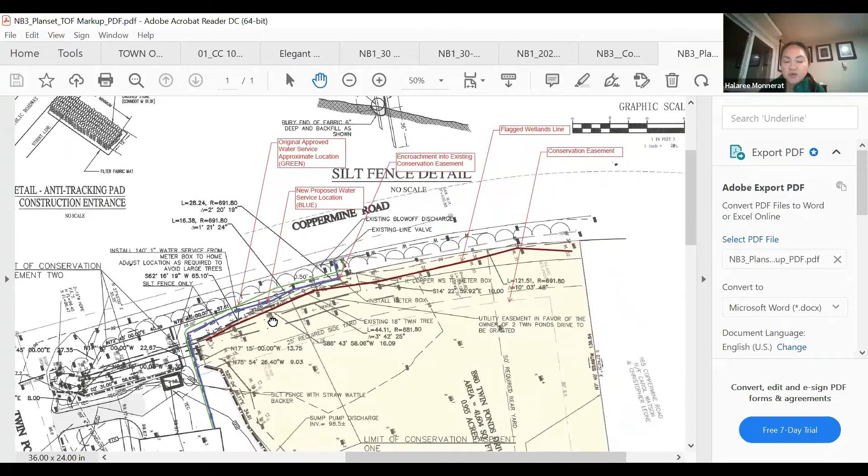Okay, so 2 Twin Ponds Drive. Can the applicant give a general description? I am requesting that we make a modification to the previous approval to just move the water service a couple feet onto my property instead of the public right of way, because per regulations we can't run water service on the public right of way. So I'm requesting that we just move it back a few feet onto my property.

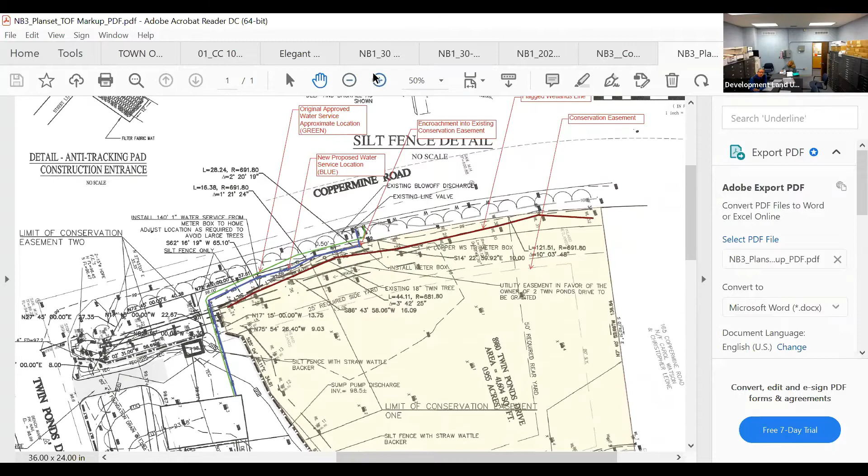Okay. If everyone read the agenda reviews, we've been working pretty long hours on this with Halaree, the state health department, as well as Connecticut Water. The way they had it shown before is the green line, and you can see where it comes off the main line, curves, runs along the right of way, and cuts back in. They won't let them do that per state law; they have to come off at a 90-degree angle out of the property. So that's what this shows: it comes out into the right of way and then follows along on their property back in. More or less it follows the same line.

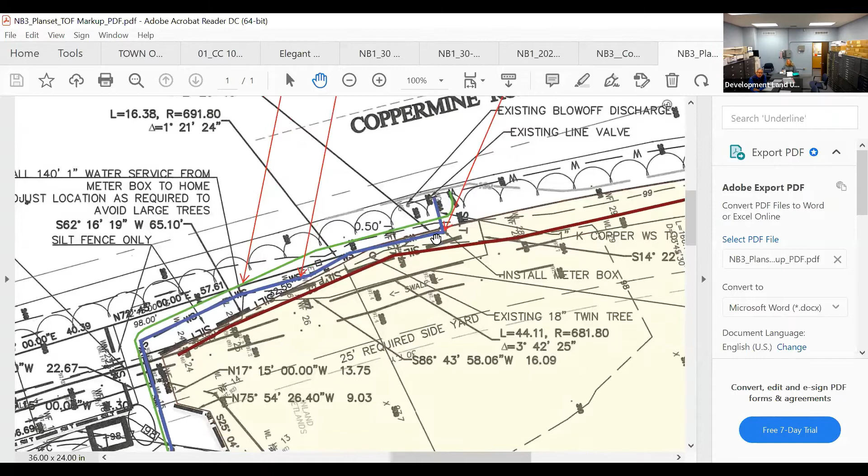The only difference is it does cross into a small portion of the conservation easement here. I showed everybody in here there is a statement that allows such things to happen during building: the grantor reserves the right to enter the property for the purpose of constructing and maintaining any improvements, including drainage structures which are required or permitted by the approval granted by the Farmington Inland Wetlands Commission. Hence why we're back to you guys.

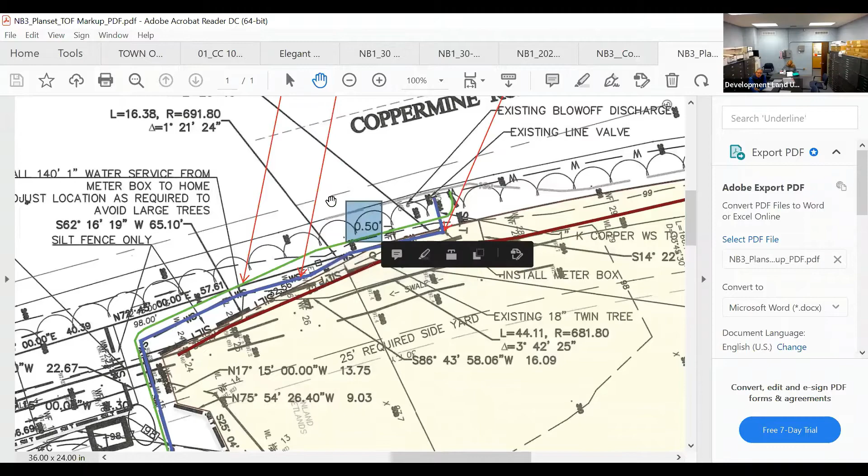I guess also we're making a motion. I think this is a slight modification, so maybe this is ancillary, so we can just approve it tonight. That would help them out to get this thing started and get over to the house so they can get into the home.

Okay, well I guess I'll go for any questions. Mark, do you have any questions? No, I don't. Okay, Dave Fox? Just a couple quick ones.

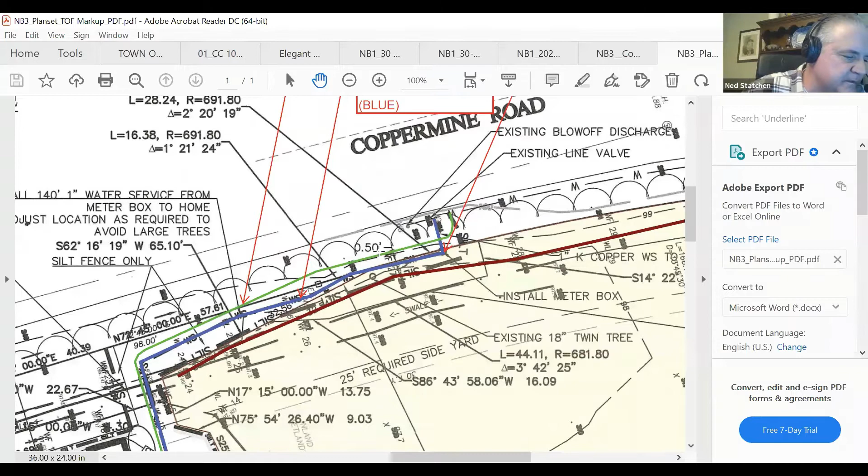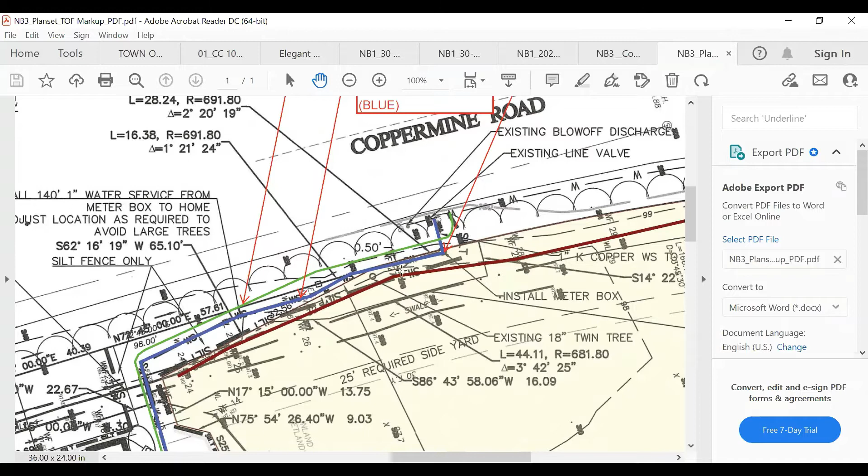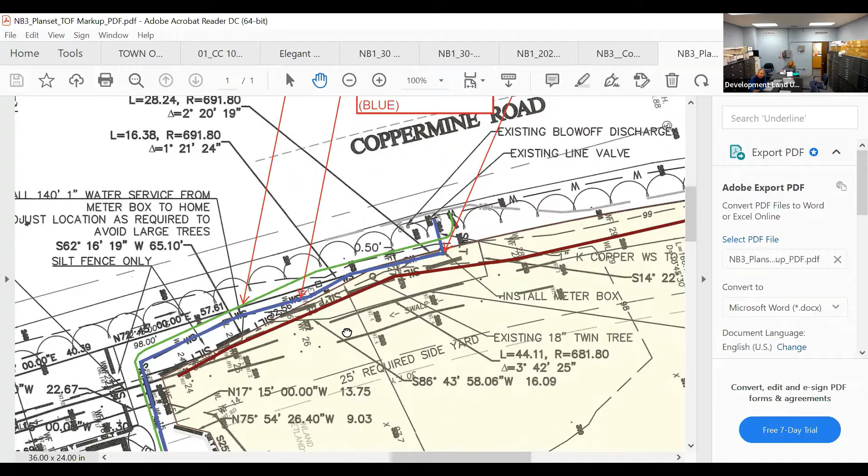It looks like the blue line is about halfway closer to the wetlands red line beneath it. I was just wondering, I can't really tell how many feet separates the line from the wetlands edge, just approximately. Let's take a look here. Find the line. If this is 27 feet, let me see here. What's this? I can't... that's 13 feet there. So I would say it's got to be... stupid thing, locked up again, I hate when this does this.

It's probably 5 feet or so.

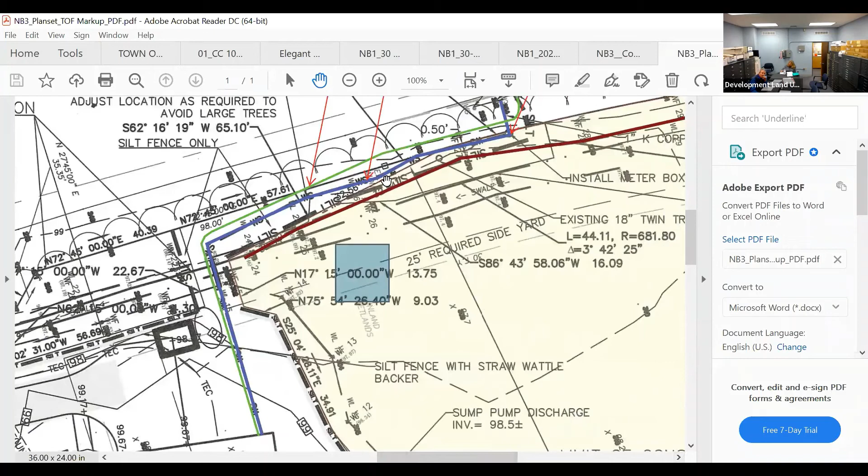There's a portion where it says silt fence only, as opposed to the fence and the sock. I was wondering why that was. That was carried over from the original plan, but I do have that in my agenda review, that it has to be silt sock as well. Okay, thank you, I'm done.

Along those lines, the silt fence with straw wattle backer - it says silt fence only in some parts, then here it shows both. So we'll be going with the silt fence and straw wattle at both locations, right? Yep, okay.

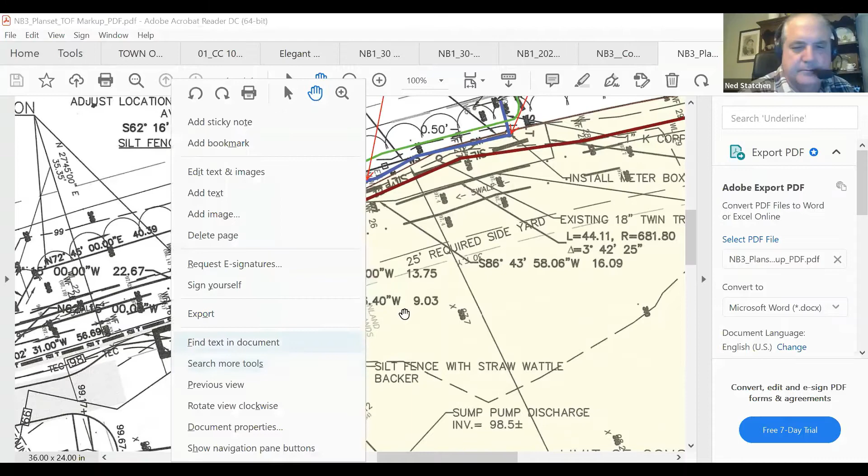Neil? Nothing from me, thanks. Robert Eisner? No questions, it looks like a slight modification, a necessary change without substantive change in impact. Yeah, I would agree. Did I get everybody? Rich Berlandy? He's not here. He's up, okay, but you got everybody, yes.

Is this out of the swale? I see the swale is here, so they were going to be running it parallel to the swale and then cutting across in the same spot. So the only real change is right along the edge of the road - it's going to be in a portion of the easement here.

It does seem like a minor change, and it's certainly necessary to get water to the property. I don't have any further questions or concerns.

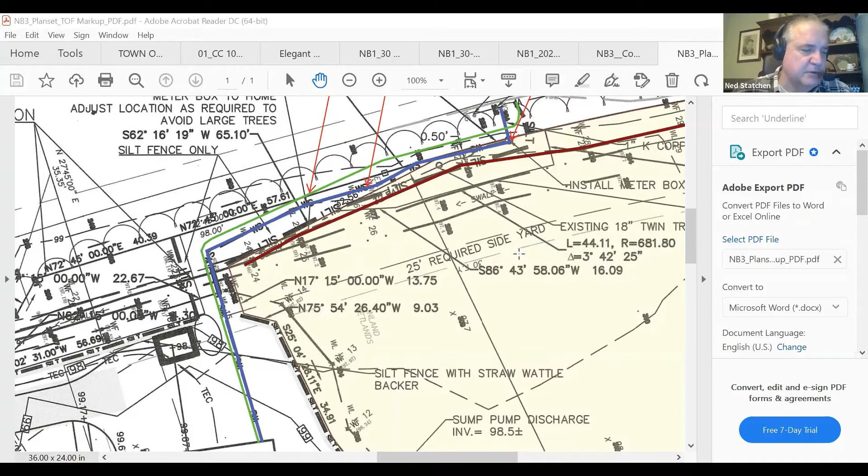The chair will entertain a motion to approve the revision, adhering to the recommendations from the town agenda review. So moved by Mark. And a second - Dave will second. All right, we have a motion and seconded.

All those in favor say aye. Aye, aye. Opposed? Motion passes.

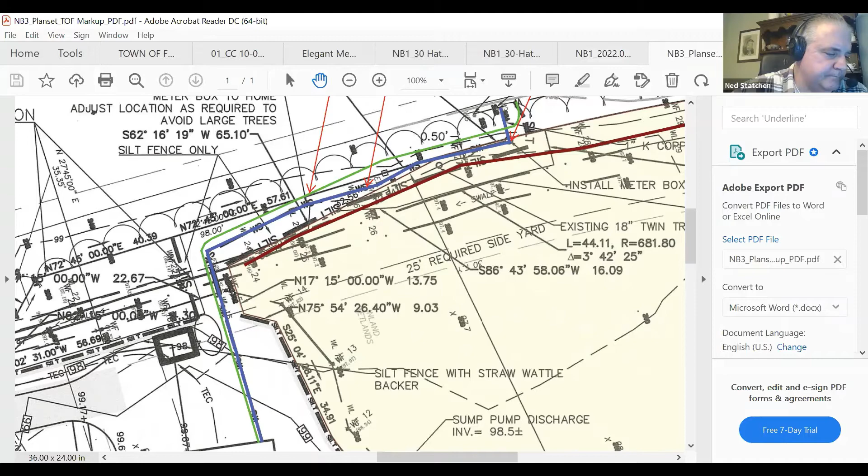Okay, now we'll go to 30 Hatters Lane. Yes, sir, let me grab that and put it up on the screen.

A little refresher - who wants to give it, Bruce or Kent? Well, Kent is on, I'll let him do it since I missed the previous meeting. Are you there, Kent? Yes. Great, just give the commission a little overview of what you're doing.

I got it on the screen, not sure if you can see that. We have an erosion problem with the stream bank in the back, and we were just going to put some armoring along the sides of it and along the bottom. For the commission, this actually captures both road runoff and runoff off of Diamond Glen. It gets piped out right here in an open swale through here across some properties and then eventually into Dorset Pond.

I'll start with my question from the review of the video and minutes. There was a small pedestrian bridge shown in one of the photos - yeah, there you go. Is that going to be replaced as part of this, or is that coming out permanently? What's going to happen with that?

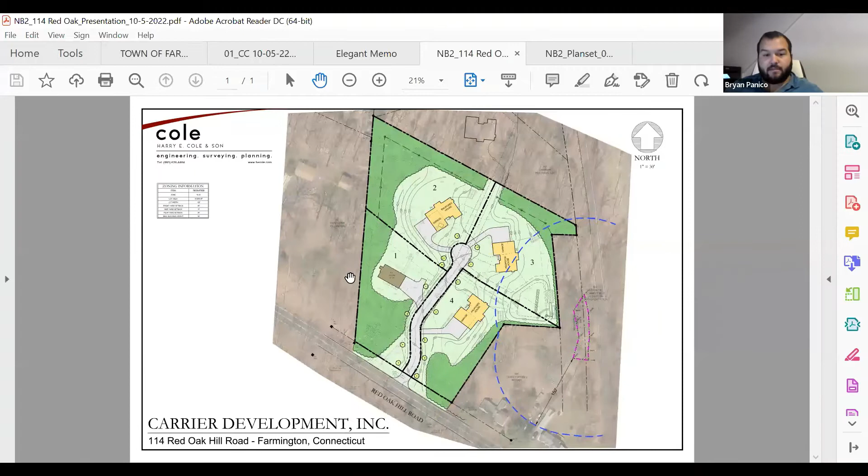I'll briefly go through the property. This is a 3.16 acre parcel, currently has an existing house on it, it's in an R30 zone. Majority of the site is wooded. Fronts on Red Oak Hill Road, which is to the south, and then residential properties to the east, west, and the north, more the southeast there.

And then the trail runs along the eastern edge, and then there's a strip of town of Farmington property between the trail and this lot 3 there, as you can see on the screen.

So the application is for a 4-lot subdivision. All the lots have a minimum area greater than 30,000 square feet. We have conservation easements proposed along the perimeter of lots 2 and 3, about 10% of the parcel area there.

This will have public water and sewer from the property to the north, which is also owned by Carrier. That project was approved a couple years ago now, and they've just kind of started construction on that.

There is a small pocket of wetlands in the eastern portion of the property. It's not actually on this subject property. It kind of straddles the town of Farmington owned property and then state of Connecticut owned property, which is the trail there.

There's a drainage pipe roughly in the center of that wetland area that runs underneath the trail and discharges water to New Britain Avenue. That pipe is slightly elevated off of the ground, so essentially that area where the wetland is, and some of the area surrounding it, generally creates kind of like a little ponding area, a little detention area before that water can get released out of there.

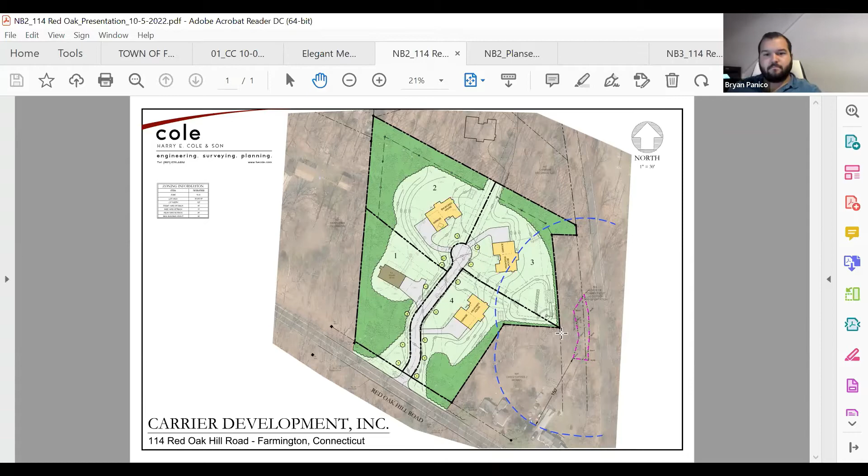However, just adjacent, as Bryan said, straddling town property and Connecticut state-owned property, there's a small depression - a topographic low spot in the landscape. This wetland was essentially created when they put in the original railroad line, cutting off the topographic low point and creating a man-made depression. So basically that whole hillside drains down to that depression area.

There's an outlet pipe elevated a couple of feet above the depression that conveys flows east to the other side of the rail trail. On the other side of the rail trail, I don't think it's wet - if memory serves, the rail trail sits elevated above this wetland by probably 10 to 15 feet, and on the other side it's very dry, very sandy, kind of stratified sands and gravel. So it just daylights and then gets reabsorbed back into the ground as recharge.

Some important things to note in my findings: essentially, if you're looking at this site, there's a drainage divide. Lots 1 and 2 occur on the western higher elevations of the property, where you have Wethersfield sandy loam soils. Then right through the center of the property, essentially at elevation 255, which would be lots 3 and 4, the hillside stops and you level out onto this very flat glacial lodgement till plain landscape.

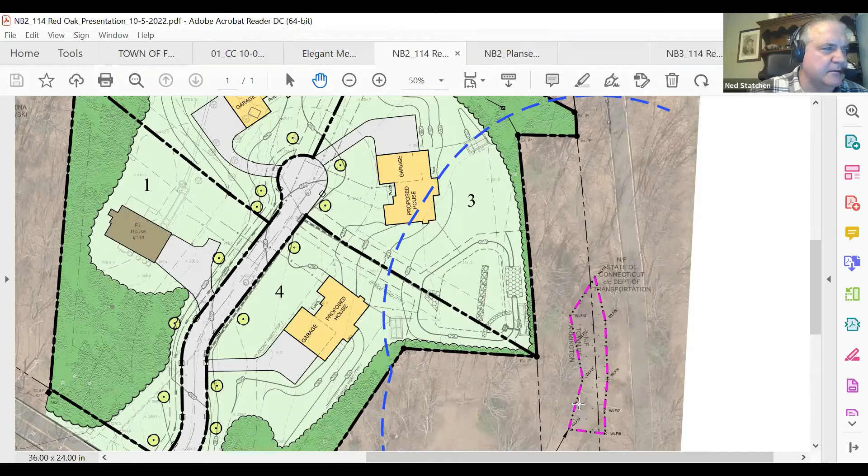I know there was a comment by the town to take the drainage off, and I'm looking at the previous rendition, or I have that right here. Yeah, give me a second. That's right, that's right here.

Okay, so that's the change you're talking about, that we took it off the town property and ended it. But I guess I'm confused as to which is the one the drainage is supposed to go through. Is it the wide open spreader? What's the lower elevation, what's the first source of drainage to come out?

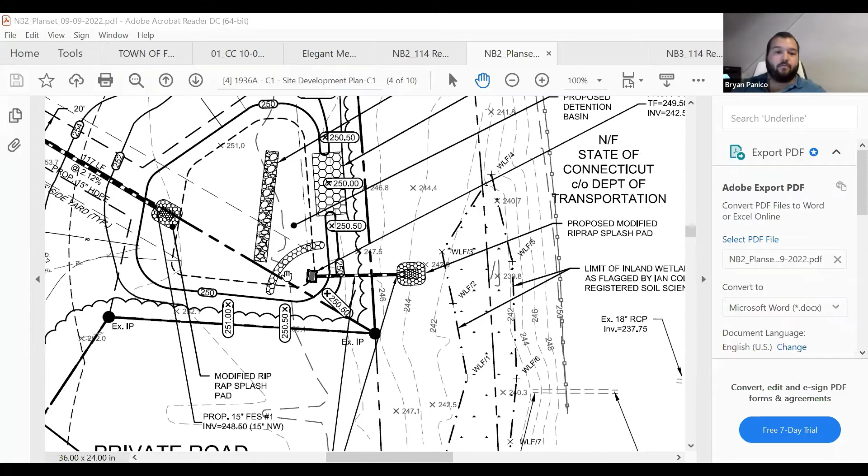So the plan that you see in front of you is what we had submitted, and that was prior to the knowledge of the wetland there. The presentation drawing is showing an infiltration level spreader on just the subject property due to the wetland being there, and obviously not wanting to discharge a flared end with a splash pad 5 feet from the wetlands. So the rendition we would be proposing moving forward would be to do this with a level spreader at the property line to ease the flow back to the wetland.

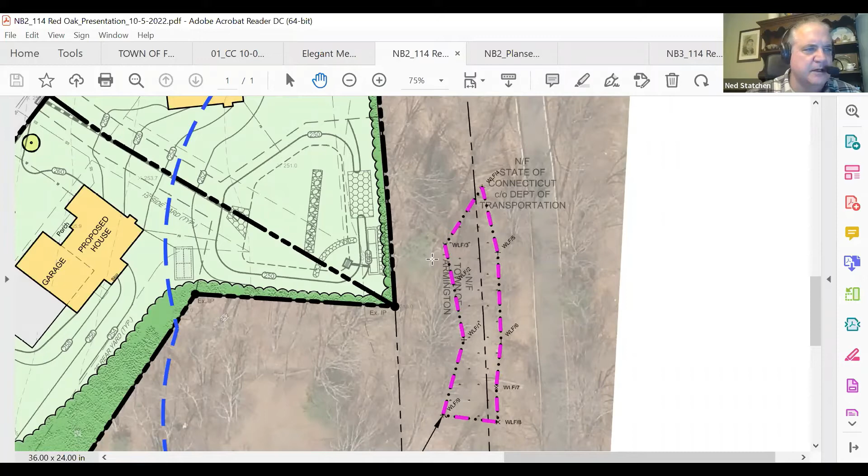Okay, all right, yeah, I see that now. And this drains underneath the rails to trails with a pipe that empties on the other side, and then it just kind of dissipates. I know there's a small area there.

So it would flow through that pipe underneath the trail, then basically flows between New Britain Avenue and the rails to trails. There's about a 15 or 20 foot section of kind of overgrown grass in that area. It's a little bit depressed there as well, but there's a catch basin adjacent to that pipe, and that also has a pipe with a flared end on it.

So the water goes underneath the trail, kind of fills up that little area on the other side of the trail between the trail and New Britain Avenue, and then flows into the drainage system in New Britain Avenue as well. So it's kind of like a low impact design version of conveying the water from this whole area through the trail and downstream.

It's shown right here on our GIS. It doesn't show the pipe, but the water would come down, cross the property here, go into a pipe here, and then gets into this pipe system and gets piped all the way down and outletted out to here, which is over by the trail, then goes underneath the trail and heads out towards the Tunxis Mead off property.

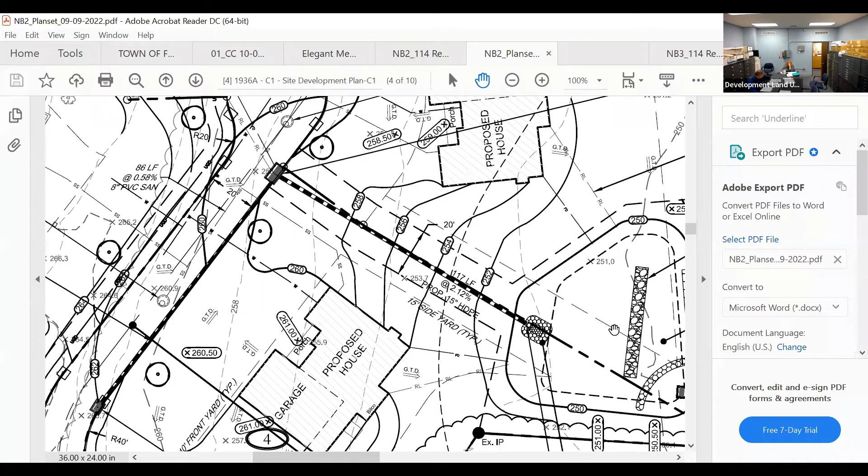That's all I think I had for questions. So for the 150-foot mark, you're just taking the corner of one house. We'll be in there, and obviously the whole drainage, the whole runoff feeds there, the pond.

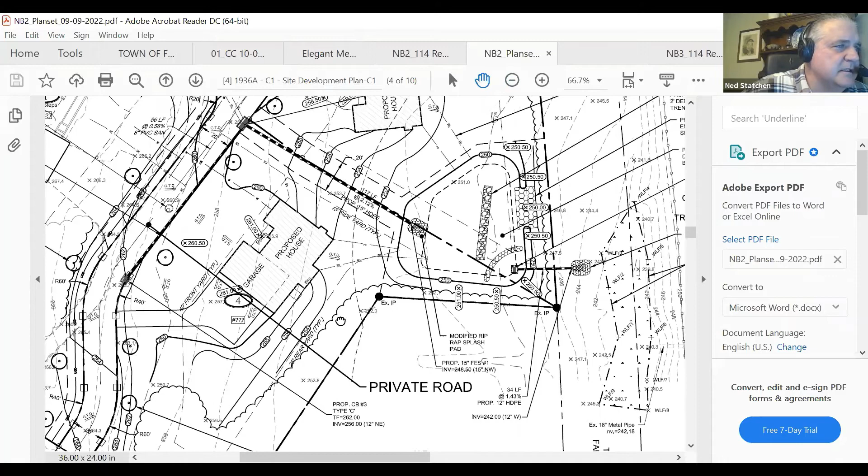Correct. And then you had mentioned there's going to be a conservation easement in there. Yes, so we have conservation easements along basically the backside, the northern side of the property, and those match up with the conservation easements on the neighboring property to the north as well.

All right, that's all I have for questions. Does everybody else think of anything else?

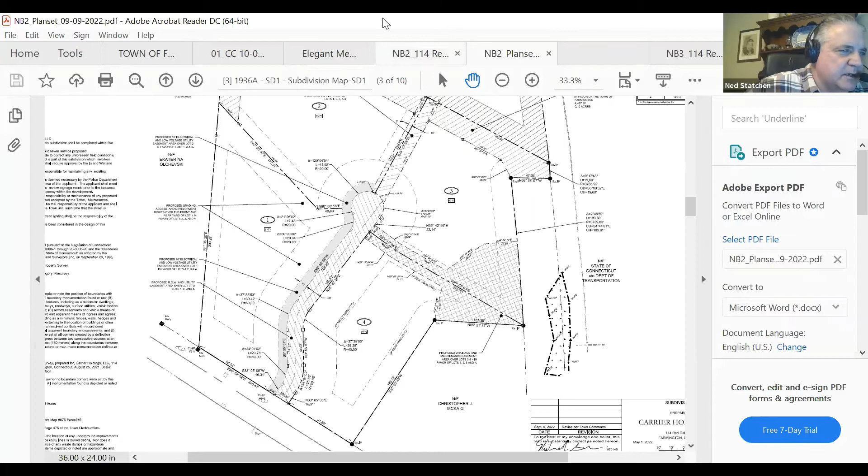Rob? I would lean towards the site walk, but I'm fine if the rest of the commission is negative on the site walk. Yeah, I'm kind of in the same spot. I have mixed feelings. The limits of the wetland are so small, and for all the times I've ridden on this on the rails to trails there, I've never noticed that there was a wetland type area there.

I guess we'll take a vote, or actually, people were on the fence, so I guess I'll ask you to decide. I don't think it's necessary, based on the area being very small, and it's kind of squeezed in between this development and the rails to trails, and it's on town land. So I don't know, I would say it's not necessary, but let's get a yay or nay from everybody.

Mark? I would say nay. Dave? Yeah, I could live with that. Okay. Neil? No. Okay. Rob? You've swayed me, I'll make it unanimous. Nay. All right, okay.

All right, thank you. So the vote is for no site walk. And what's our next? The determination of significance.